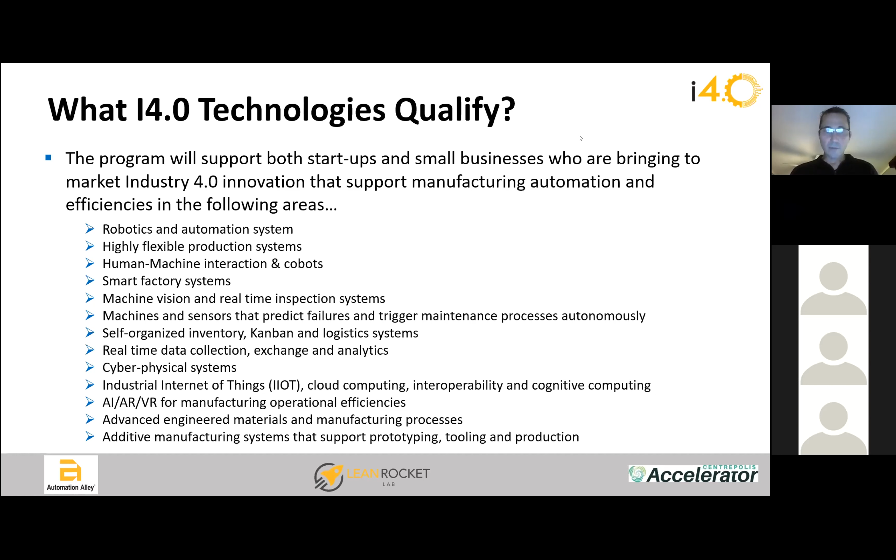If our Michigan manufacturers are going to be successful, small, medium, and large, they need to be adopting these technologies, state of the art. So we actually created a global accelerator that was inviting the best in class Industry 4.0 technology companies in those categories to Michigan to partner with Michigan manufacturers to consider piloting their technologies, doing live demonstrations, and then if they really help support throughput and quality and operational efficiencies and reducing CapEx, OpEx, then it's going to make our Michigan manufacturers stronger.

At the same time, it's going to attract these companies to Michigan, because they're starting to get a customer base, many of which are coming maybe from outside the state or outside the country. As they develop customer relationships here in Michigan, they naturally are going to set up offices. So it's really an economic development mission, to help make our Michigan manufacturers better. If we improve their operational efficiencies, they're going to have better margins. If they have better margins, they're going to be more competitive when they bid on projects, and more important, relevant and competitive globally, and stay in business.

We also very smartly worked with system integrators and automation distributors to be a part of our program as well. As you know, many times selling into manufacturing, you need tier one suppliers that are certified and system integrators that manufacturers already rely on. So connecting these I4.0 tech companies, especially when they're out of state, to someone that already has boots on the ground in Michigan, has really worked.

This is a look at all the corporate partners we have now. We have 24 manufacturers, big and small, as well as system integrators and automation distributors that work with us. We work with our I4.0 tech scouts, their operational efficiency teams, and we introduce some of the most promising I4.0 tech companies that we see, whether they come from Europe, Asia, South America, Silicon Valley, or right here in our home state. We introduce these great technology companies to the companies you see here, so they can consider adopting those technologies and demonstrating them to understand the value.

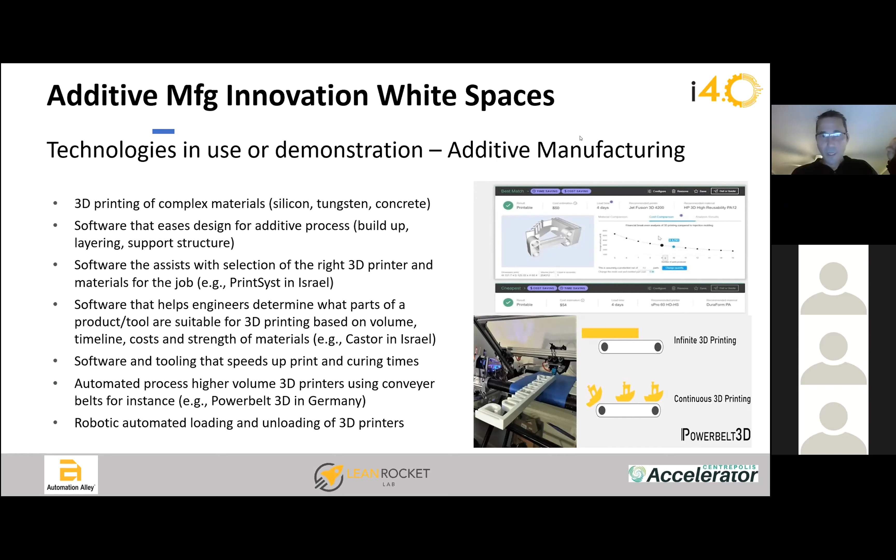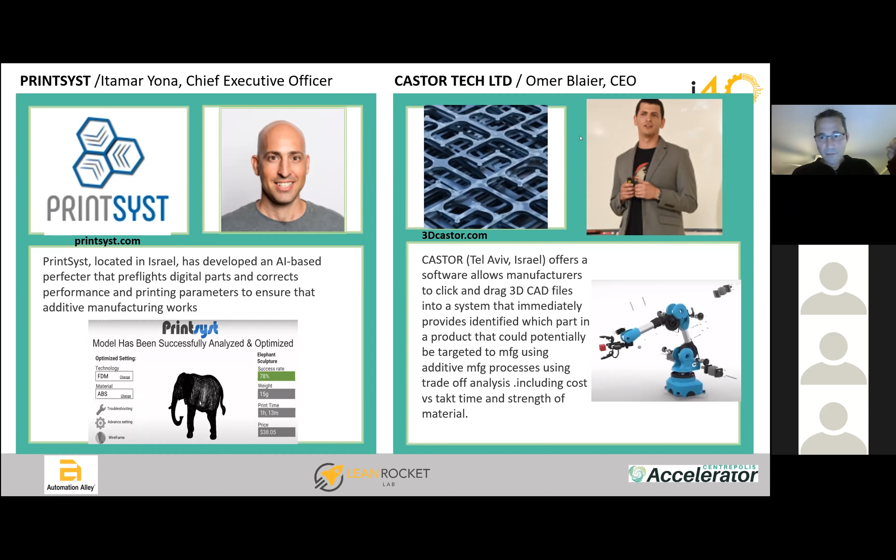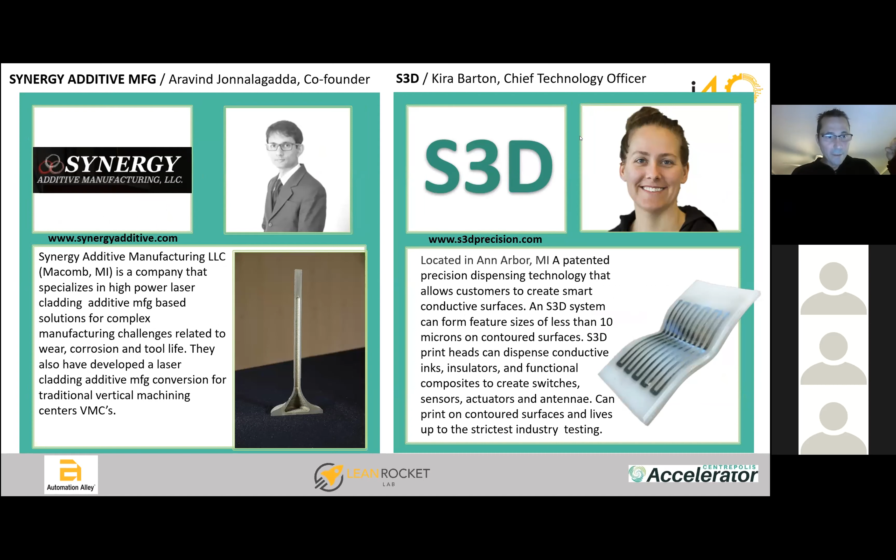There are companies developing next generation materials, like Qualified 3D, Pierre's company, and companies developing next generation cladding systems with the ability to print microstructures, conductive ink on polymers and glasses, and that type of thing. Another example is a unique additive manufacturing technology for specific applications: the ability to apply dry fiber, carbon glass, conductive wire on textiles. You can imagine how that would support cooling, heating, and seating for automotive, for instance.

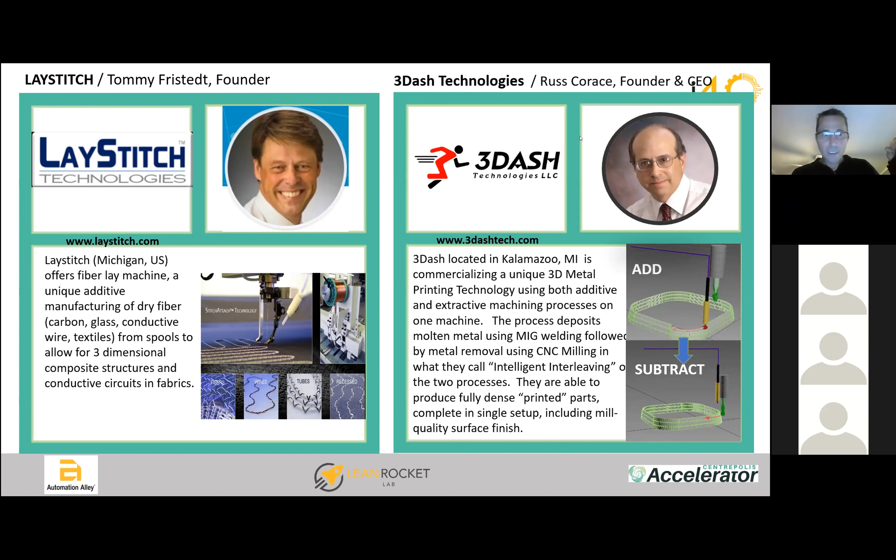We're seeing technologies that do both additive and subtractive processes in the same machine, like 3Dash, and companies that have continuous printing processes. We'll even see additive manufacturing uniqueness in different vertical market niches, like Intecells. This is one of our clients.

They have a cold plasma technology that basically prints on electrodes for the battery, the cathode and anode, which drastically reduces the complexity of making lithium-ion batteries as made today, reduces the footprint of the plant and the energy cost, and allows for manufacturing of thicker cathodes.

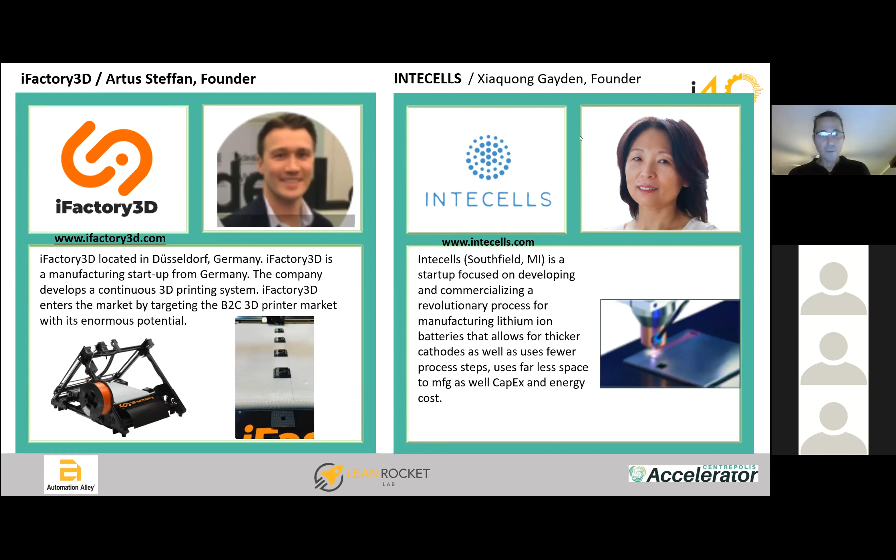But now I'd like to introduce our additive manufacturing experts. Both David Bolognino with Integrated Additive Solutions and Pierre Marat with Qualified 3D are experts and residents at the Industry 4.0 Accelerator. When we see innovative I4.0 technologies, we often use Dave and Pierre as our experts in vetting the technology to make sure there's something unique about what they offer. They also help us introduce those great innovations into Michigan manufacturers. They're here to talk more about practical implementations of additive manufacturing, unique post-processing opportunities in the case of Dave, and Pierre is also going to share more about how to generate sales with additive manufacturing.

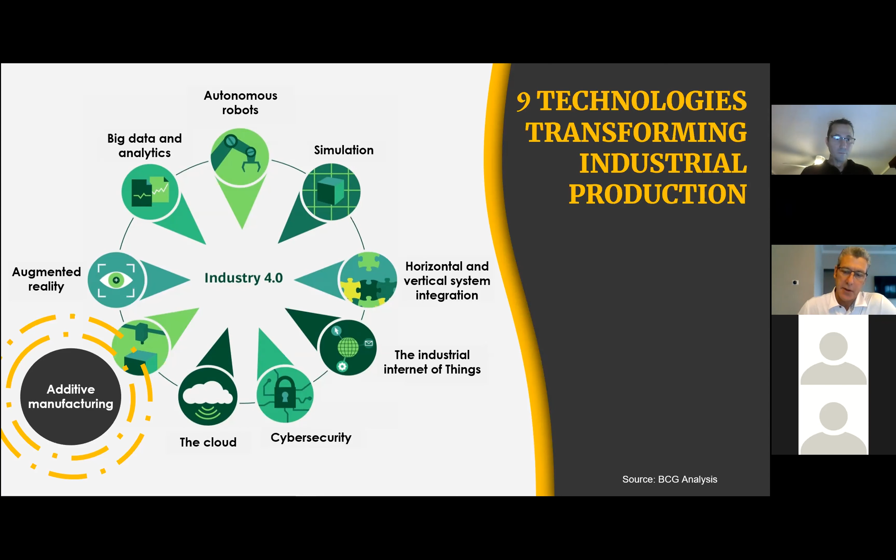So, everyone at this point on this call, I'm assuming, understands pretty well Industry 4.0 and its attributes. Just wanted to point out that these are all digital technologies. Additive manufacturing is really only one of those technologies, and it's been used a long time for prototypes, increasingly for tooling and some low volume production. But basically it's really the intersection of high value, high complexity, and low volume, and that exists in all the industries, auto, aerospace, et cetera.

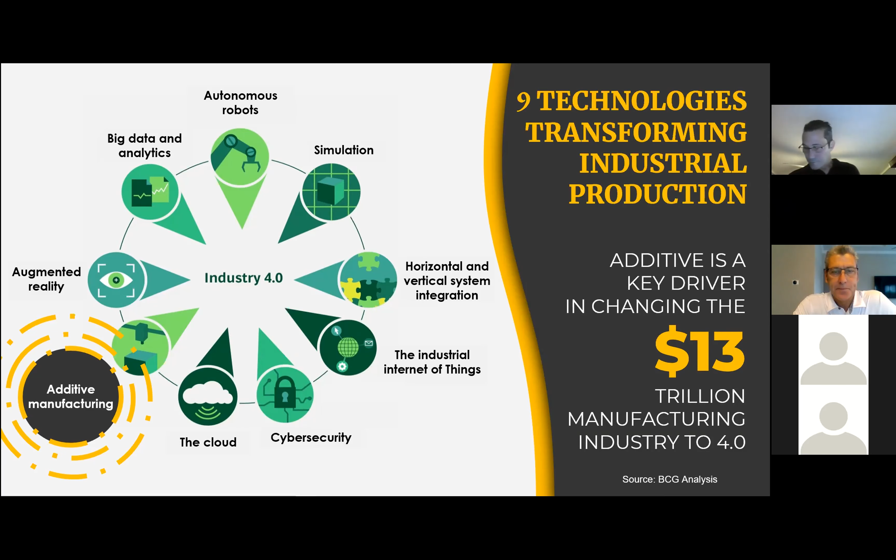But really the holy grail is production. Everyone's increasingly looking at how to get to production. Of course, you have to understand what is production. Production can mean a handful of parts for aerospace, or it can mean thousands and thousands of parts for automotive. So you have to understand what production means to you.

But irrespective of that, post-processing is an increasingly big part of the cost of 3D printing and manufacturing parts with additive manufacturing. This is a survey from a few years ago, the Wohlers report. You can see about 25% of the cost is attributed to what happens after the print. So the print is just the first part in the whole value chain. The post-processing investment has increased proportionally, but still the ability to post-process or post-print at scale is a significant limiting factor.

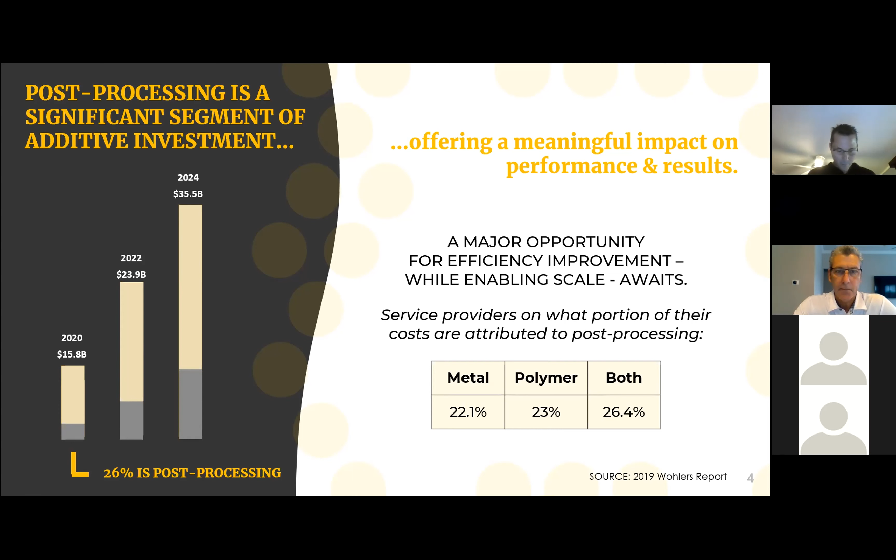So how do you define post-printing or post-processing? We define that to be really one of five things, or a combination of those attributes. The first would be material removal, so that can be resins, that can be powders. It's really the stuff that's left on the print after you're done.

And then of course there's support removal, which if you've had experience in 3D printing, you know that there's not a process out there that is without supports. And so those supports need to be removed. Some of them are easy insofar as they can be dissolved, but some of them are difficult, in the case of metals that have to be physically removed.

There's secondary processes, which includes machining critical areas, installing inserts, et cetera. And then there's finish improvements, which is finishing the parts for a customer facing part, and painting and plating.

So the level of post-processing varies, right? If you think about what the end use of the part is - if you're making a tooling fixture or a jig, you could understand there's very limited post-printing or post-processing required. In the case of, say, a marketing model that needs to look like the finished product, there would be a significant amount of finishing and painting and plating.

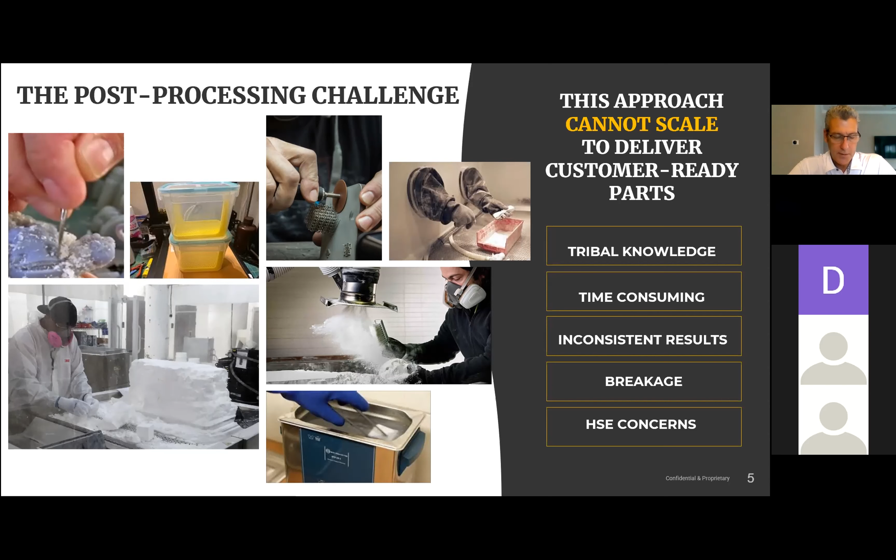Similarly, if you were doing this in a manufacturing environment, particularly with customer facing parts, you need those parts to be finished. But the problem with post-processing as it exists today is there's a lot of variability in the process. Oftentimes it's the tribal knowledge of the people doing the work - very time consuming, inconsistent results from those manual processes. A lot of breakage - some of the parts are still fragile, particularly in the green state. And then certainly some health and safety and environmental concerns around all of those chemicals and processes.

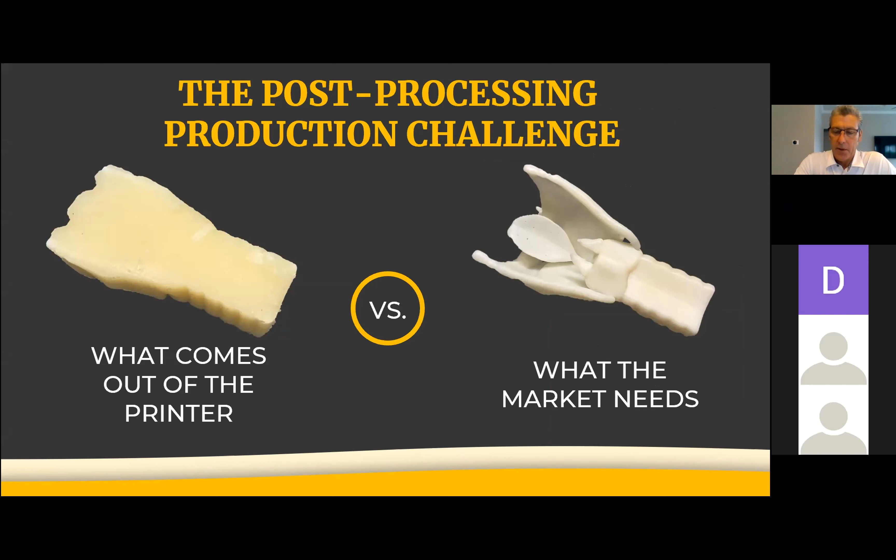So this is a pretty obvious example of post-processing. You see, this is an Objet machine. What comes out of the printer is something that's entombed in support material, and then of course what the market needs is on the right hand side. This is some sort of medical model where the supports have been liberated. Ordinarily that would be all done by hand without any process control whatsoever.

Of course, if you've got human intervention here, you get an operator who's had a bad day or maybe is ill or whatever, and he's off his performance, and then you have parts that are no longer conforming and they're waste. The next one is the skilled labor.

This is an interesting one. Most of the printing operations are using skilled labor to do the work, and that's basically because they're offshoots, if you will, of the prototype shops or the prototype operation. So a lot of times you have super skilled labor cleaning parts, which really isn't the best use of their time.

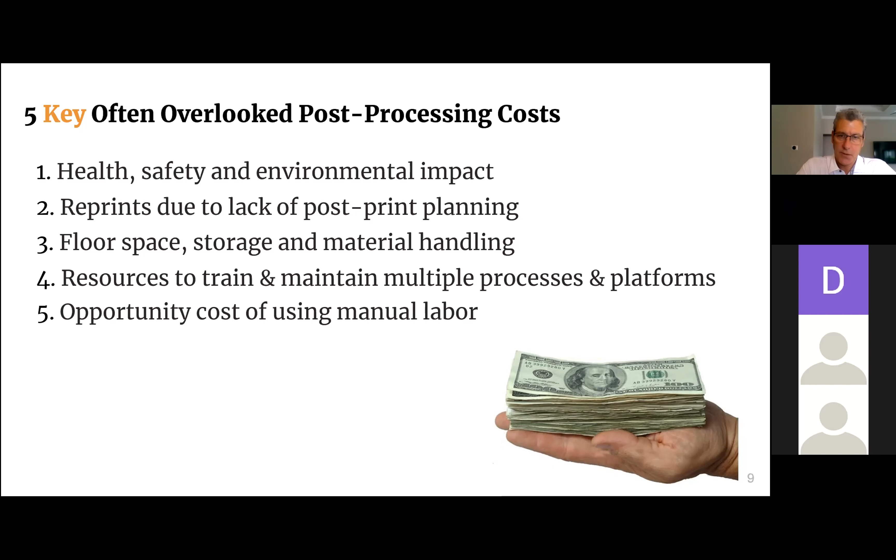There's the resources to train and maintain multiple processes and platforms. So a big deal in a service bureau where you're running various technologies, all of those have to have specific training. And then of course, the lost opportunity cost for using manual labor to do these operations.

So one of the challenges to enabling additive at scale is, in my mind, this whole post-printing activity. If you think about Industry 4.0, you've got a digital file that turns into a digital print, art to part, and then it moves off into the finishing room, if you will, to be handled manually. Obviously there's better ways to do that, we think, and it certainly is an inhibitor to scalability, sustainability, traceability.

You think about losing your traceability in something that's very critical, like a medical device or an aircraft part, and then all that relates to quality assurance issues.

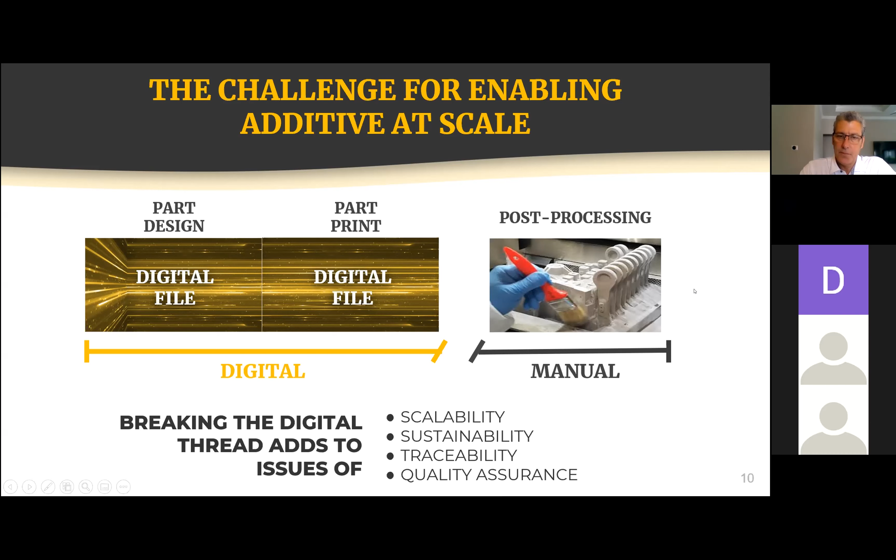So to maximize the impact for Industry 4.0, I think there needs to be some attention given to how to create a total end-to-end automated process that includes part design, printing, and post-processing.

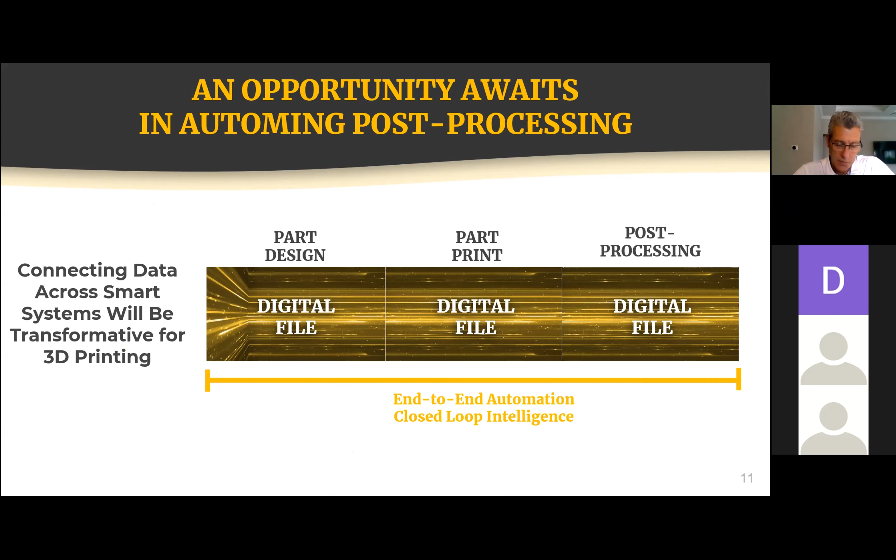So one of the teams I work with is in Buffalo, New York, Post-Process Technologies. They're innovators in this space and have developed several types of machines to do resin removal, support removal, powder removal. And I think they're offering an interesting combination of machinery, chemistry, and software to help scale additive manufacturing. So if you're interested, I would encourage you to give them a look, or feel free to contact me directly if you'd like an introduction.

All right, David, are you done? I am. Yes, thank you very much. Yeah.

I'll take a couple questions here. When you showed the slides on the cost structure, it was pretty obvious that post-processing is rather significant. I'm wondering how much of that is labor, because so much of it is labor, in some cases skilled labor, right? Yeah, very skilled labor, and it's very skilled labor in a time where it's very difficult to get skilled labor.

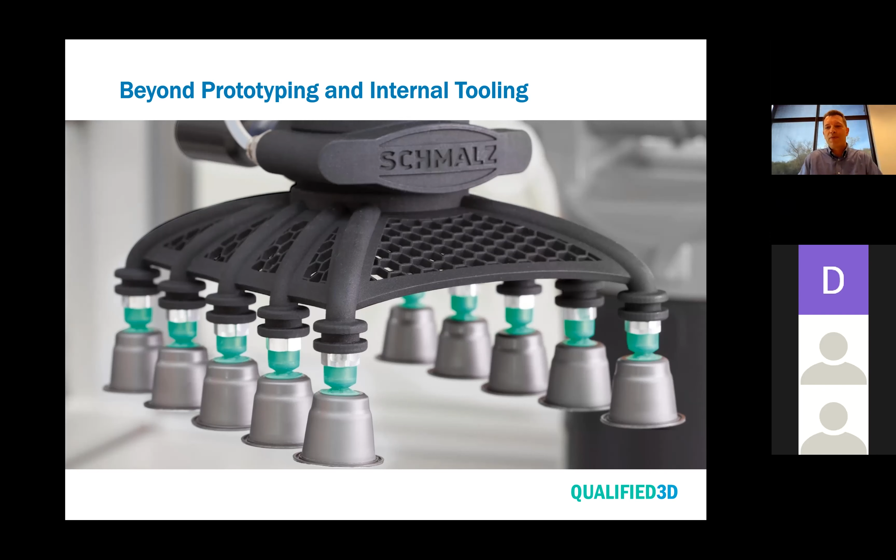But the question is often, what do we do in our own activity to not only reduce costs, reduce lead time, simplify operations through 3D printing, but how do we move into the outside world?

And you see examples around us everywhere, like every single example on this picture, and I could have put a lot more pictures, whether you talk about chocolate making, rocket manufacturing, house construction, or dentistry and orthodontics.

These are applications where the market is changing rapidly because of the use of 3D printing technologies, not only to reduce cost, but also to find new markets and new applications.

So we're going to talk today, and it would be a very down-to-earth approach, so not much scientific content, but really down-to-earth concepts and ideas. How do you build a plan to create revenue opportunities?

And I will take 4 components of a plan, and we're going to talk about what to do, and a few examples. It's not an exhaustive list of what you should do to generate revenue, but just a few ideas applicable to small and medium manufacturers.

So we go concept and ideas, and then modeling. Then what do you do with the print job? How do you store it and make it a product in itself? And then how do you sell to the outside world through a catalog, for instance, of fixed products and configurable products? So let's start with the concept and idea, which is probably the most difficult thing to share here.

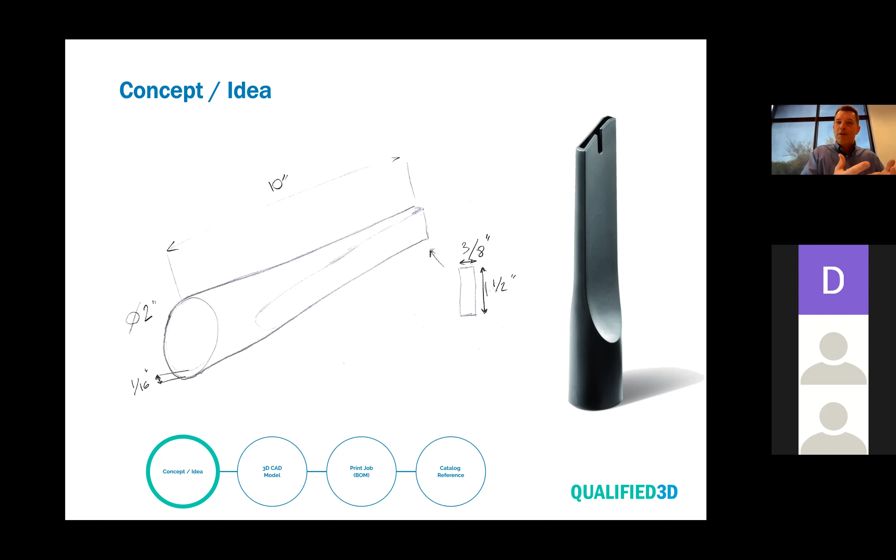I think that's the most important part of your project - find the concept that applies to your market. So here, you see the concept, and it's something that you can already sell, or at least you can monetize it.

Then you move into modeling it. So there's also a cost of doing this, an expertise for doing this, but you can also start at that point. Once you have the concept and the 3D modeling, you can actually use that in a different manner. You can actually sell, for instance, these models for someone else who wants to make them, or you can transmit that to a company that will make these products for you.

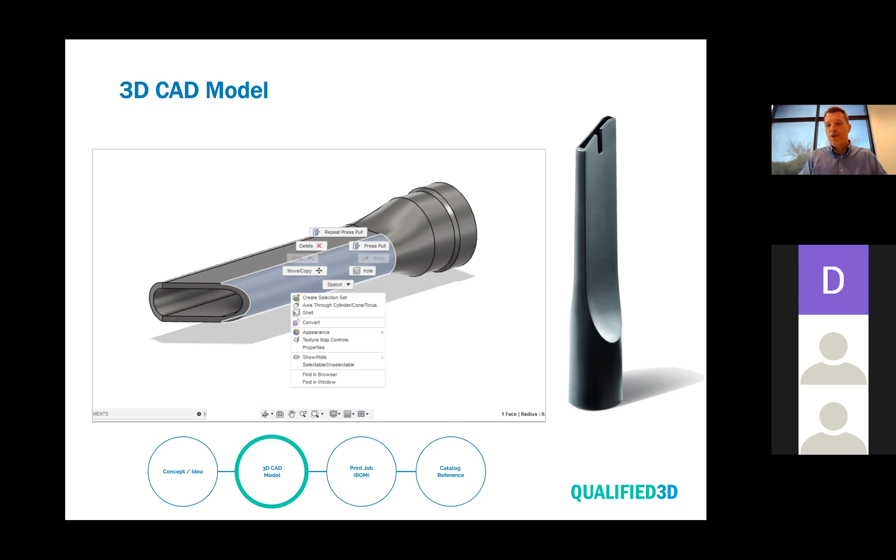I keep going downstream just to show the scope of how operations work. Once you have a single or a few models, you can create a print job. And so that's also something that can be stored, that can be used. The print job or the BOM can be for multiple products or a single product.

I think it's an important step to consider when you are going to distribute a product in several locations. Let's say you want to create an inventory of this product in the US and in Japan and in Europe.

So what you will do is make sure these are exactly the same products everywhere. You're not going to send someone a 3D model. You're going to send all the instructions, including the printer files, the sliced models or full builds, with instructions on post-processing. Post-processing is a critical aspect of your parts, and if possible, it should be automated for end-use parts. So you're going to store that—there's some cost, but also great value.

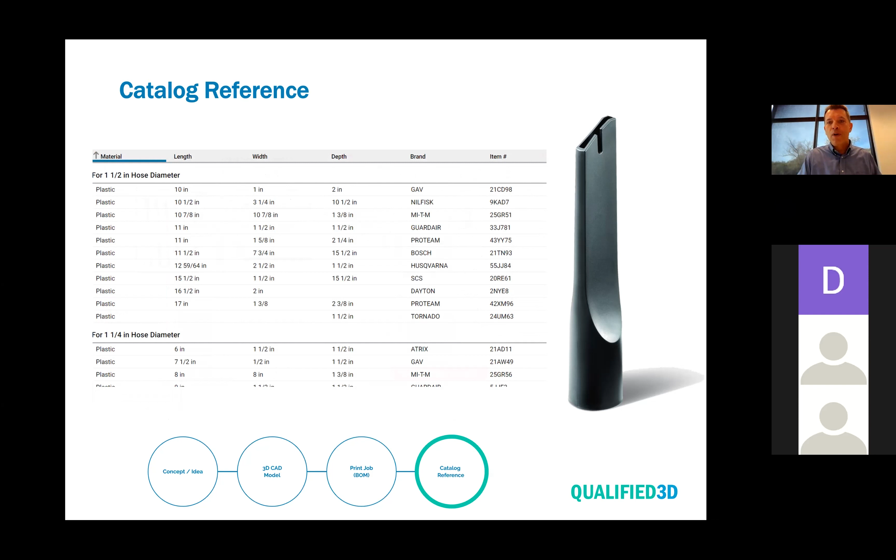Finally, you're going to sell these products not as a build but as a catalog reference. It could be the typical industrial distributor type catalog where they pick a reference, and it pulls from the right BOM you've created to print your product. Or next step, you could create a configurable product made on demand by the user himself, who can go beyond picking a simple reference and define exactly what he wants. Without anyone touching the models or files, it generates a print model with all instructions automatically.

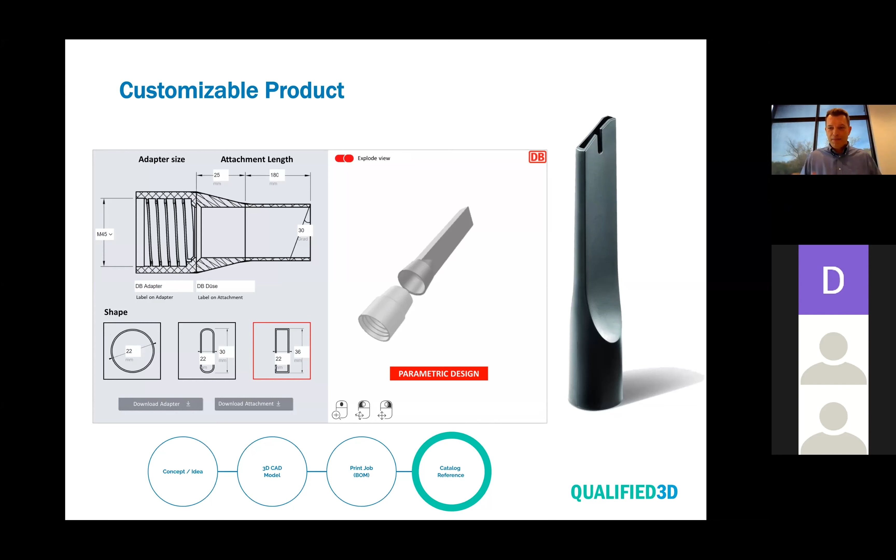So those are four examples of what is required from a technical point of view to create revenue. Let me now go through examples and practical recommendations on how you can make this happen. I mentioned concept and ideas is probably the most difficult thing.

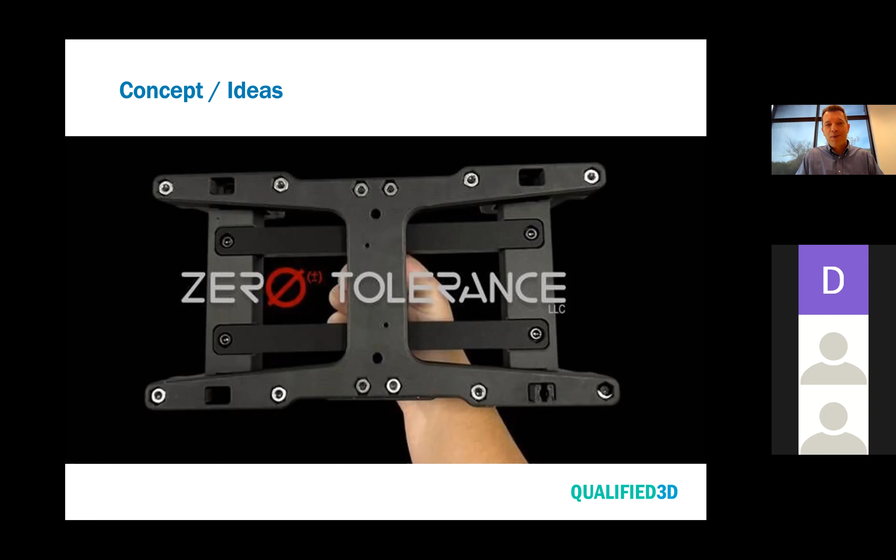So they invented a concept, and now they can take it to the outside world. If you have ideas you've implemented in-house, don't think it's something you can keep only in-house—it's something that can probably be sold. Review that. I think you have experts around you, for instance at Centopolis, who can help you work on making an idea a product, prototyping it, manufacturing it, and launching it on the market. So if you have an idea, pull from the resources around you to make it a sellable product.

Now let's move on. We said we have an idea—let's make it a concept. Now suppose you don't have an idea, but you have great 3D printing capabilities, and you want to sell these capabilities to the outside world. What you'll need is to receive models from someone and then make them a physical product. So you'll have to receive the files, prepare them, and print them.

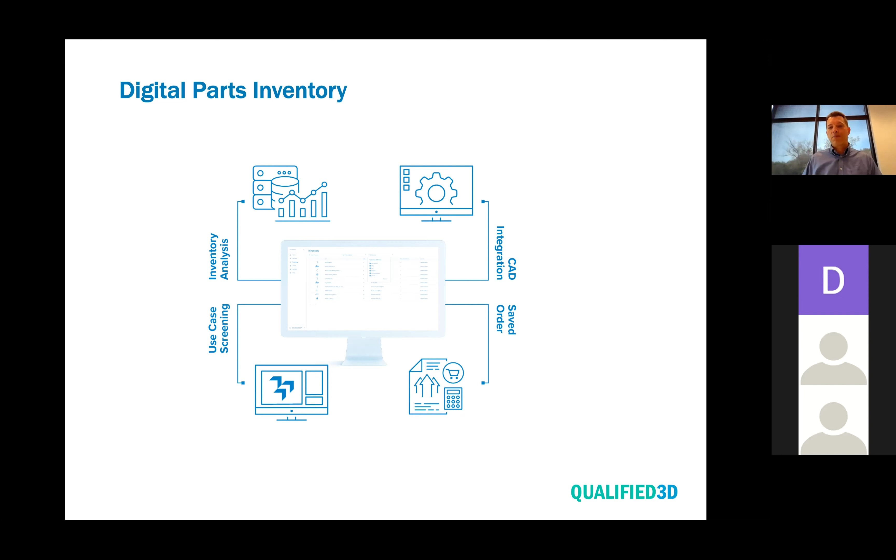So if you don't have the industrial equipment available or the software available to create your own inventory, but you have knowledge on which parts would make sense, you can still launch that without investing too much.

The value is in the design. So if you create a BOM, you can actually manufacture these products not in-house, but through the network. And that's a very powerful option.

Again, it's something that Project Diamond allows you to do. You can create a part using machines that belong to other companies. And as long as they agree in giving you access to their machines at a certain price, you can route parts through multiple locations, and around Detroit, have a team of companies make your product.

And it's actually a principle that is used by most service bureaus and most manufacturers. Everybody specializes in a few processes, but then buys specific materials or processes from other companies, and they help each other. There's even services that allow you to white label a marketplace.

It's a brand new thing. It's a service called Otto by Shapeways. So they let you run their production equipment under your name. Of course, they take a nice margin in the process, but it can be interesting if you have ideas, but no manufacturing equipment.

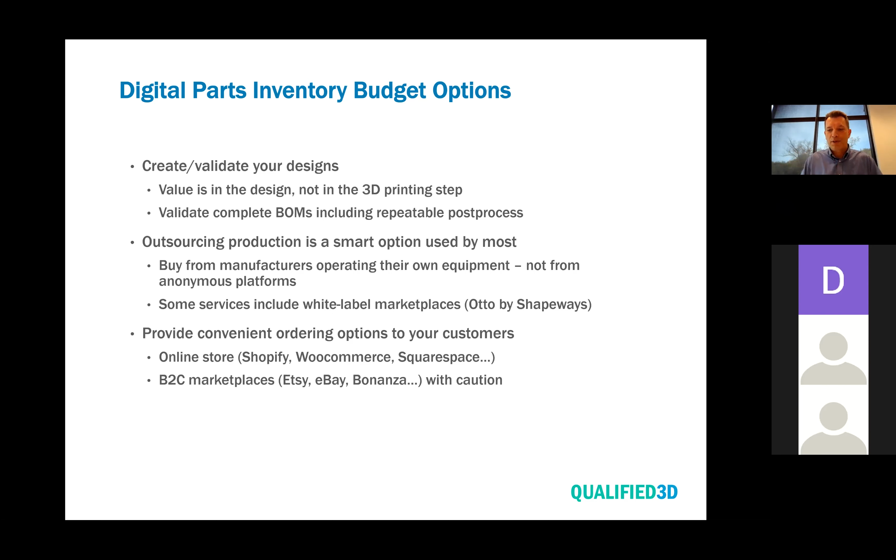We work with some of them already, and they do custom design workflows. I'll give you an example: the gripper, or the robot tool that you saw at the beginning of this presentation, developed by trinckle. It allows you to automate the construction of this gripper by just uploading a part and telling the computer, or the browser—it's a cloud service—where you want the suction cups, which interface you need, the weight of the part, and things like that, and it will completely automate the construction. So it's very convenient for end users. They don't need an engineer and a CAD system to design their gripper. They can just do it on your site.

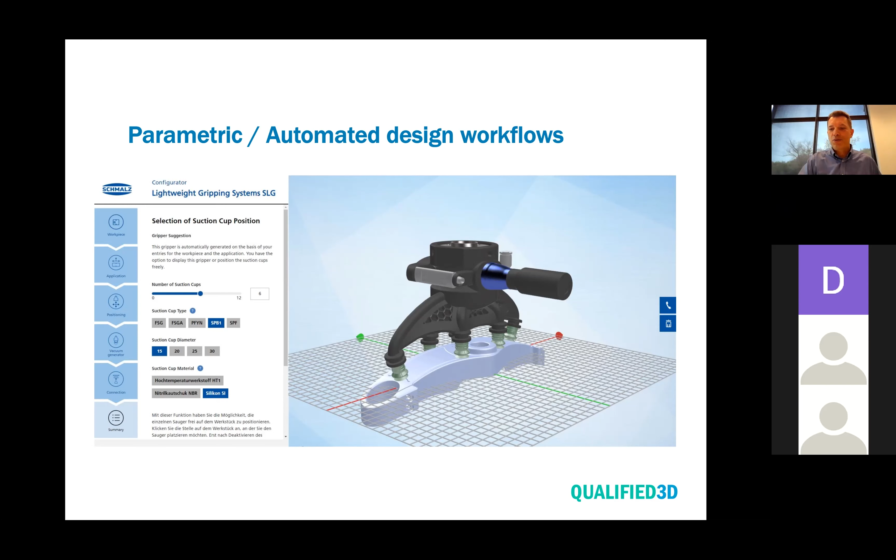A custom workflow such as the one from trinckle is actually a pretty long process. You need the concept, the CAD development, the interface needs to be developed and then integrated with your systems. So these are relatively expensive systems—typically between $20,000 and $40,000 plus an annual subscription. It's nice if it can replace an engineer and increase sales. But what if you don't have the budget for this?

My recommendation right now for people who don't have a huge budget is to work using a combination of Rhino 3D, a popular CAD which has a plugin called Grasshopper that creates very nice parametric design options. It normally runs only on Rhino, but there's another company called Shapediver that allows you to upload the Grasshopper definitions and run them on a web page in the cloud. So for between $50 and $500 per month, based on what you want in terms of integration through a frame or through an API, you can get a quite powerful configurator that attracts customers and allows you to sell your product. It's not complex.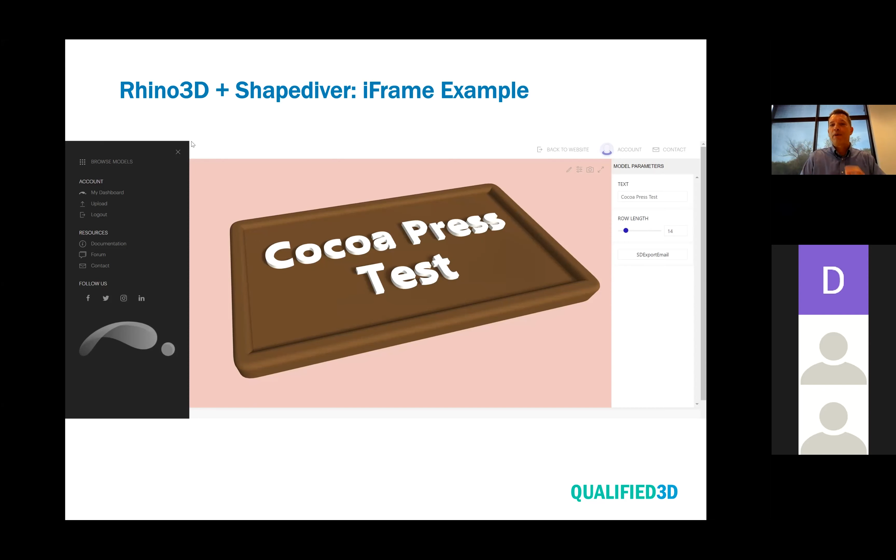The example I give here was run by an intern at Automation Alley for a chocolate manufacturer who was going through a CAD program to customize the text printed on each chocolate, and it was very time consuming. Here, online, you can do that. The intern did that with zero training—well, she was already an engineer, so she could understand these concepts—but it's done very inexpensively, and you can fully automate the process online for somebody who wants to order a chocolate.

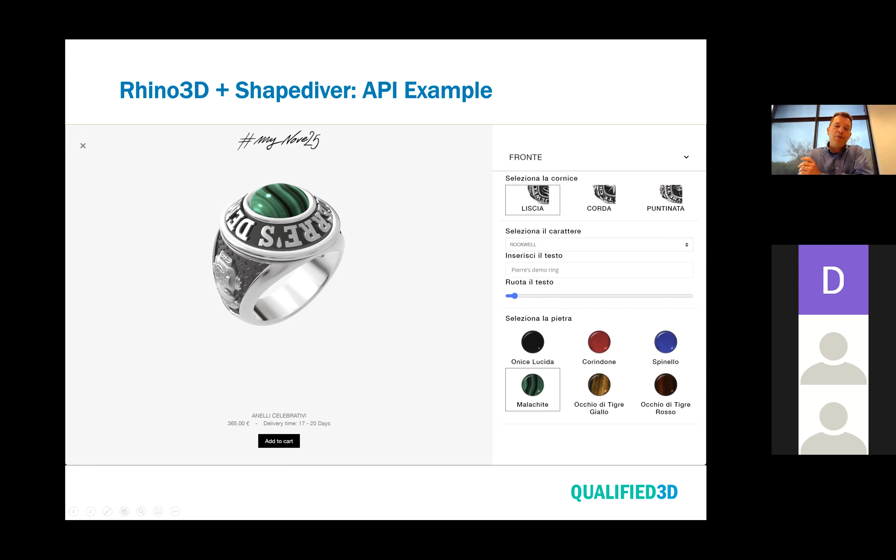Other companies do the integration through APIs. This is an Italian jewelry manufacturer where the end user can go and select the type of engraving, the type of design that they want, and immediately visualize it with a pretty good rendering online. It's in 3D, and they can order it.

Last example—it's not 3D printing, it's CNC machining—but it's a lighting manufacturer allowing you to do custom designs, and you can order online. It's very, very convenient.

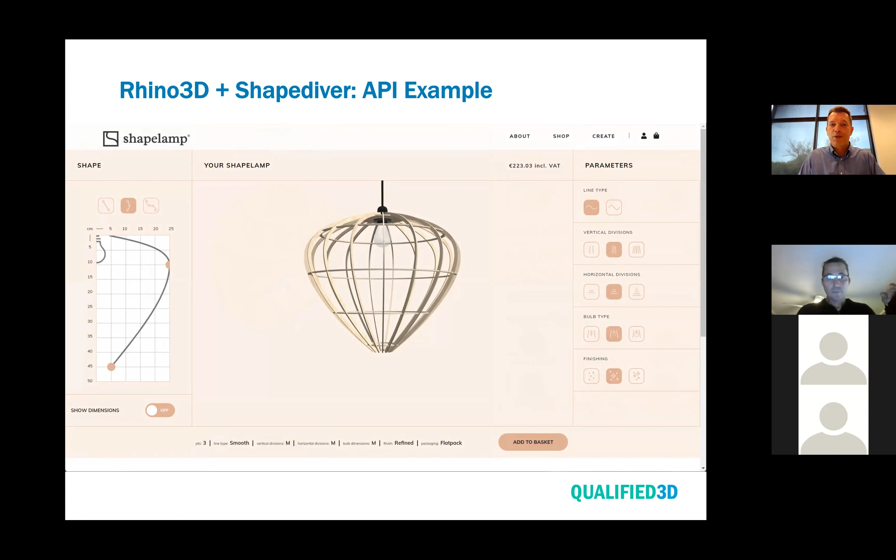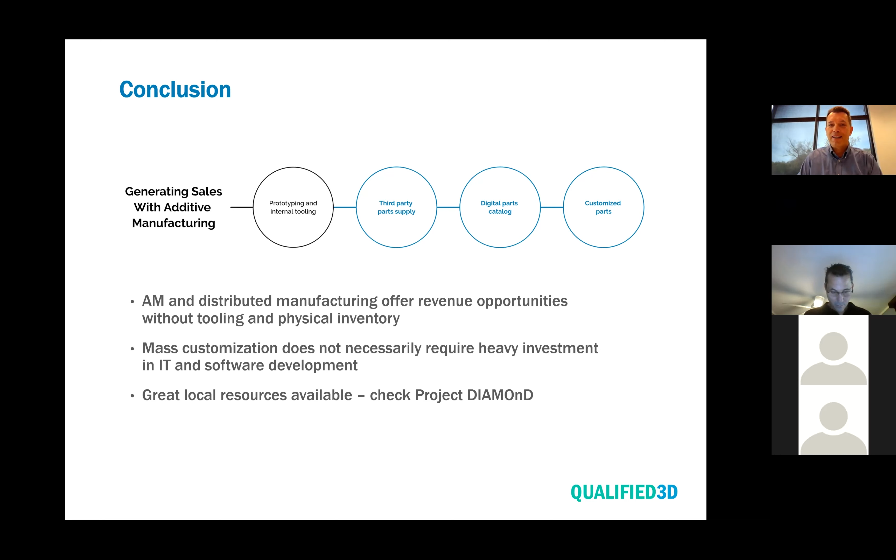So as a conclusion, you can easily, even if you have very limited budgets, create revenue opportunities, even if you don't have the machines, even if you don't have the IT infrastructure. Please realize that you have, around Detroit, great local resources, especially within Project Diamond and at Centerpolis. You can find help, and all you need is usually the idea to start with, and you'll get answers and help very quickly. And if you want help, I'm available. You have my email address. Don't hesitate to reach out.